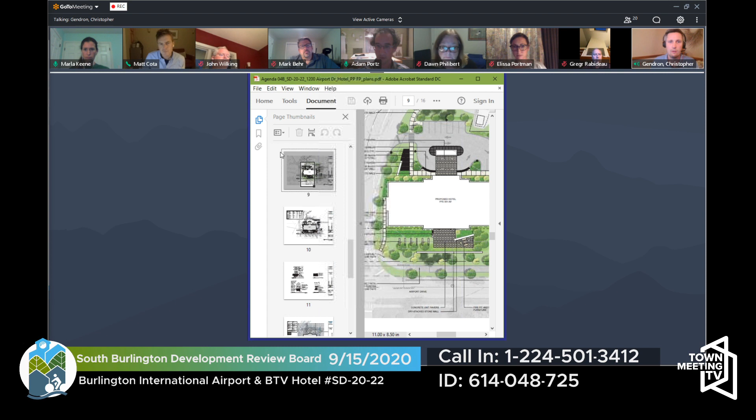Yeah, those 2 graphics right there. So you can see this graphic is showing what was proposed previously, and then the next graphic after will show you what we had updated it to. Hold on a moment, folks - you're a document wizard, it's a lot to keep track of.

So is that the way we're looking at there? Is that path the way it is on the plan, or is that the meandering path? No, that's the one on the plan, isn't it? That is the path on the plan - that is the straight alignment in the original submission, which was more minimalist in its landscaping between the path and the wall.

And if you look at the current plans, it's more in character with what is there today, in terms of having vegetation on both sides of the path, a mix of deciduous and evergreen, creating the canopy experience that I think Marla referenced in her staff review. This includes saving a number of trees - we did some regrading to make sure that would happen.

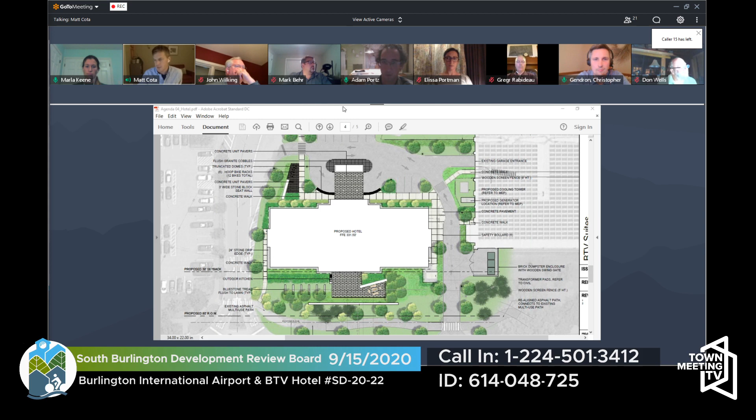The comment is: pedestrian safety is not impacted by the reduction from 22 to 19.28. However, staff recommends the board discuss with the applicant why they believe the reduction is necessary. Staff considers a reduction of 2.72 feet to be significant and likely to result in unsafe parking conditions, and recommends the board require the applicant to reduce the requested modification. So if the applicant could help us understand why you proposed 19.28 rather than 22 feet.

Yeah, I can take this one. It's pretty straightforward. The dimension was actually from those brick pavers surrounding the porte-cochere area, so the actual width is 25 feet. We actually needed more width than the 22 because we needed to do some turning — we needed to make sure vehicles could do a full turn. It's actually Marriott's standard to have 25 feet in front, so we gave them 25 feet, not the 19.28.

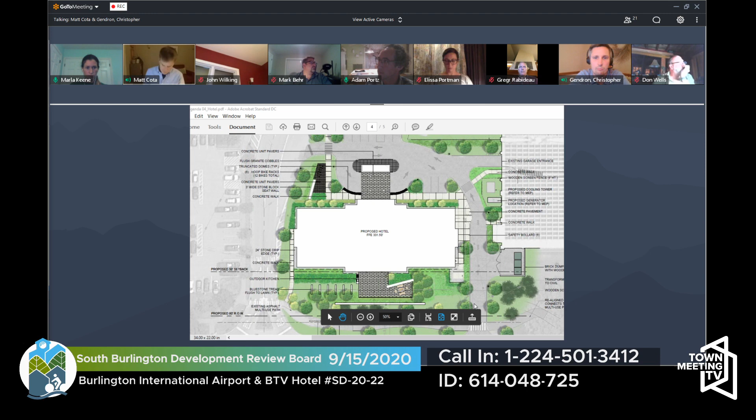I believe I had submitted an updated plan showing that, correcting that dimension, just to clarify. Okay, so we are not 19.28, we are 25 feet, and that will be updated in the plan. Exactly. All right, moving on — it should have been updated already, but I thought I sent it.

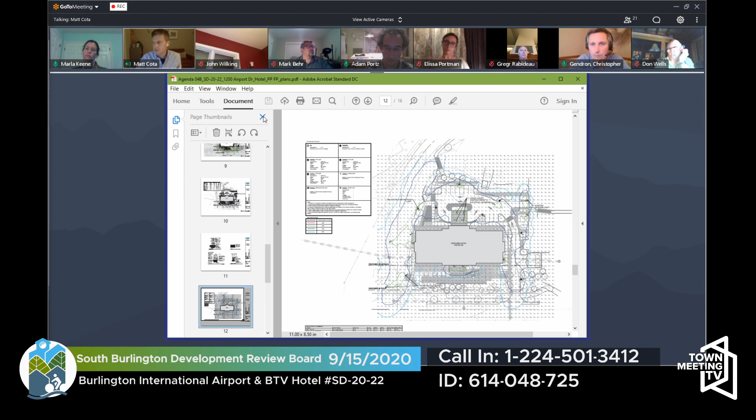Well, let's move on to lighting. The applicant is proposing a new pole-mounted fixture near the entrance drive, which results in lighting levels somewhat in excess of 0.3 foot candles beyond the property line. Staff recommends the board discuss with the applicant whether fixture A1 can be adjusted to better comply with the foot candle requirements of Appendix A, so that lighting levels do not exceed 0.3 foot candles beyond the property line. Is that doable?

Matt, we have relocated the light pole, which was submitted today, to eliminate the 0.3 foot candle beyond the property line. That was occurring down where the pedestrian path realignment occurs. And we have also previously submitted photos of the existing airport site lighting that we're relocating as part of the project, and assert that they are downcast and shielded fixtures. Okay, great.

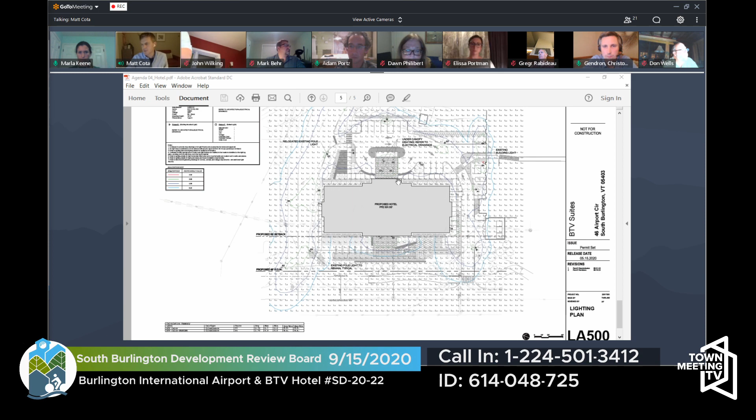Similarly, comment 7: existing light pole, no information provided about the existing light pole to be relocated. Maybe you can show us that on the map, on the plan. Staff recommends the board ask the applicant to provide documentation of the existing light pole to be relocated, indicating it's downcast and shielded. If not, staff recommends the board not allow the applicant to relocate the light, and instead require them to use a new compliant fixture.

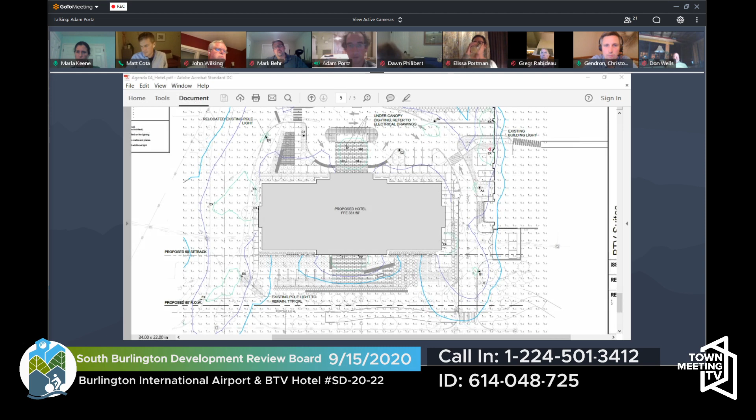Is that what you're saying before about that's going to be downcast, or is this a different pole we're talking about? No, we have submitted photos of the existing lights. The existing lights are relocated very minimally, and we assert that they are downcast and shielded fixtures. Okay, Adam, great, where is that? What sheet is that shown on? I'm not seeing it. I think those photos of the existing fixtures, Marla, were a supplemental from Chris on the previous round, not as part of this round, but our first supplemental.

Okay, thanks, I'll take a look. I'm happy to forward you the email. Oh, I'm sure I have it, I just didn't catch it. I'll make sure I catch it and make a decision. Thanks, Marla. That's it for staff comments.

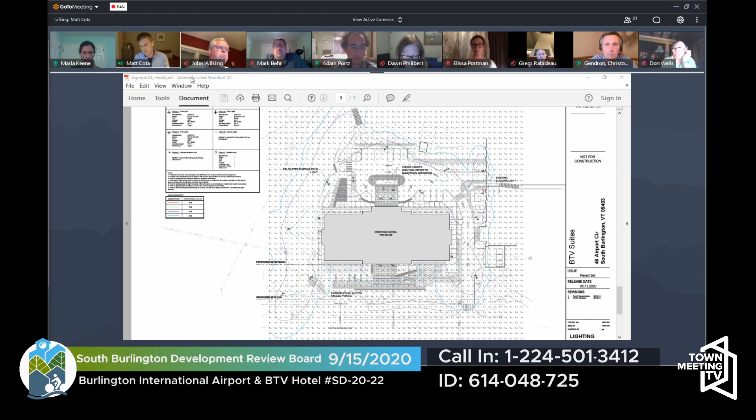You'll follow the stretch energy code, you'll have bicycle and parking storage, and you'll remove all signs from the plan. And that's it on this. Is there any other questions from the applicant for the board or staff, or any other questions from the board for the applicant before I go to public comment?

I think one thing I just want to know is this landscaping budget and the master plan — so likely, if we do go over budget, we're likely going to contribute to the master plan. What is the protocol for follow-up hearings? Is that a condition of approval that we put enough money into that, or does it need to be part of this approval? So you need to submit a plan showing what you're going to do and what that budget's going to be.

Okay. And Chris, we committed to start down at the intersection of Williston Road and Airport Drive. Okay, so that's where we'll be working, to start.

Okay. Is there anyone in the public that would like to comment on this proposal? If so, please say your name or enter your name into the chat box function. Okay, hearing none.

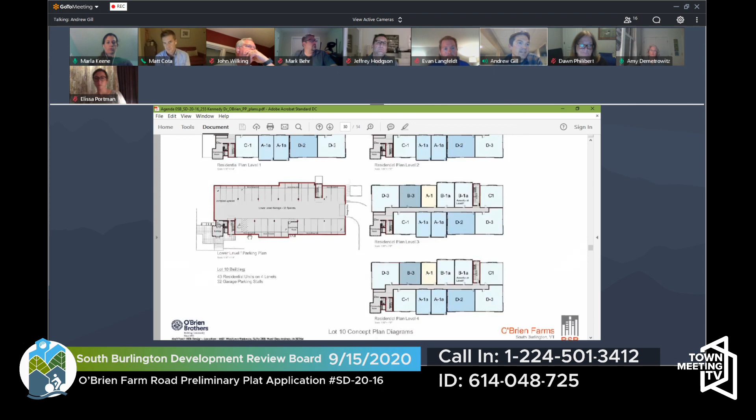I think there's potential they might still move around a little bit, primarily because we were trying to accommodate additional common spaces, larger common areas, and some of the other requests from the board. I think they're pretty solid at this point, but there's always a chance until this gets finalized. I wouldn't see any large change, more than a handful of apartments up or down. Yeah, I wouldn't see anything bigger than that coming.

But we'll have a final number at final plat. I think that's kind of what we're getting to, Andrew and Evan. Absolutely. Is that when we approve it, if it is approved at final plat, we have a number that you have to stick to? You're not going to come back and say we're going to reduce the number of affordable units. That's the number we're banking on. Absolutely, yeah, that's correct.

Now the board can discuss this, we could hold a deliberative session or discuss it here. There were conversations about different views, open for debate, about the idea of having all of the affordable units in one building. At this density, for this project, I understood the sentiment.

I understand how it's written in the inclusionary housing ordinance for affordable housing. In my opinion, but I'm not a lawyer, it seems like this is the acceptable way to comply with the affordable housing ordinance in order to provide affordable units in South Burlington. But if the majority on the board felt differently, I would assume, but I shouldn't assume, that this is the game changer for this project, that this wouldn't be possible. But I don't know. Evan, maybe Andrew, you could fill in the blanks there. How do you build this any other way and comply with the inclusionary housing ordinance?

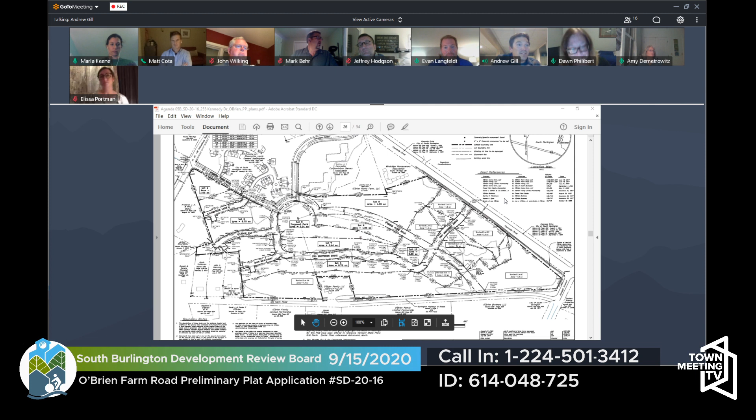So the first two units are 15 and 13. And then what's next in the sequence? What is the next one? It's a good question, and in terms of our best planning, the next one is 12, which is the inclusionary unit. And then the next phase of market apartments, in all likelihood, probably 10 and 11. Okay, thank you, Andrew — however, that could change.

And I think the point we were making was that if you were being more restrictive, say third or fourth for the inclusionary building, we would hope that concurrent permit provision could get put in. It's less of an issue if you're comfortable giving us the flexibility for it to be the fifth building.

Or if you say no later than fourth, yet if you have that caveat that says if the financing doesn't work out for CHT, that it can be amended. And that's the decision that the board has to make.

Yeah, and in any event, I think our point is if CHT was building their building fourth, we would just hope that we could build our fifth and sixth building simultaneous with them, and not have to get their certificate of occupancy prior to our permit being issued. That's the sort of nitty gritty thing we're hoping for. Just so that once they pull their zoning permit and are under construction, we're free to start pulling our zoning permit on the remaining market rate units.

Yeah, I don't think the LDRs really intend to allow you to get your CO for everything but the affordable. I think the intent is that the affordable units aren't getting their CO last. That I think is a separate matter, and we would be fine with that requirement, right? So for instance, if the zoning permit for the affordable were pulled, we would be allowed to start construction on the market rate, but prior to issuance of a CO for the market rate, we could require the CO for the affordable. Got it.

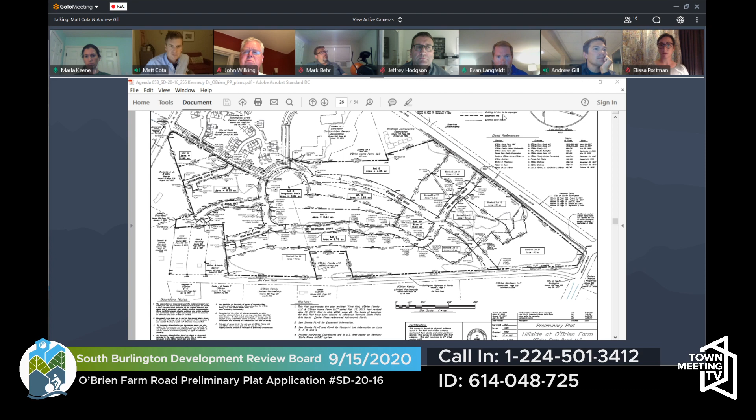Can we see, Marla, can we see a map so I can reorient myself on this roadway—bike lane, recreation path, urban road, urban sidewalk? What's the best plan for that, Andrew?

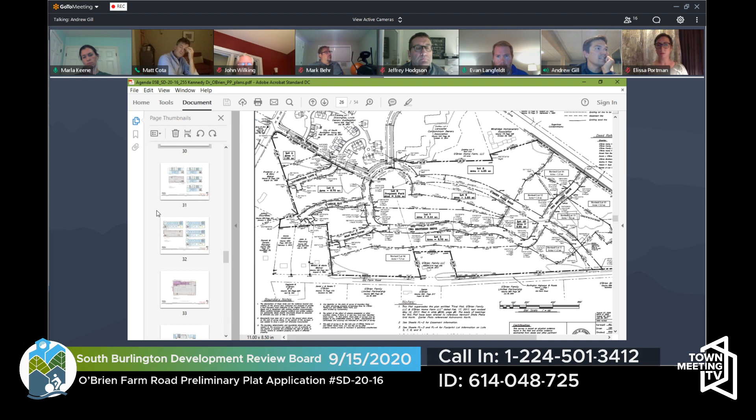Well, I'm not sure if I resubmitted it as part of this packet—it would have probably been in the original. You know, that colorful one has the roadways and units on it, I believe. This one? Yeah. It's a little bit harder to see, but it shows the road; otherwise it would be in the original packet. Unfortunately, I can't access the shared drive tonight for some reason. Also, if you zoom in on this, you can see the road and stuff is shown.

So maybe just to provide a little background on this—I think we have a bit of a difference of opinion with staff in terms of what was permitted in the initial master plan as it relates to this road. We strongly believe this road was permitted in its existing design. There was a lot of feedback back and forth with us, Department of Public Works, and VTrans on it, and it was included as part of the master plan permit. But it was also dedicated to the city and accepted by the city as part of that permit, in its configuration as it exists.

With that said, we're not digging in our heels and saying that the bike lane as it was designed and permitted, or as we believe it to be permitted, is 100% the way it should be.

The reason why that bike lane was designed the way it was is because we met with the Bike and Ped Committee multiple times, and they specifically requested that the bike lane be in this configuration. So we designed it to meet their requests. Fast forward 3.5 years, and there's a slightly new configuration of the Bike and Ped Committee, and apparently there's a difference of opinion as to what the previous recommendation was. We're not pushing back and saying we can't have it that way. The challenge is with the configuration of having to have green belts plus a community rec path plus a sidewalk. There's just not room there.

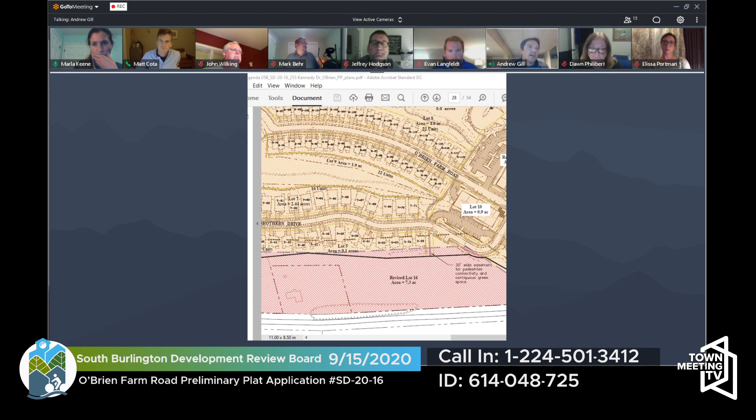So it would again be on, this is just the supplemental, so the snow storage shown in the original submission plans. I don't know if you have those available. Yeah, I can probably do that. This is the advantage of working from home if you save stuff to your local from time to time. Let me find a good example.

I think it's a question that's more general than specific - should it be considered? I think our perspective is we have a really limited amount of space on the site. Snow is obviously a very important consideration. We've identified what we believe to be sufficient snow storage areas. It is the case that those snow storage areas will overlap with places that we might have a picnic table or benches in the summertime. Our working assumption is folks don't really want to be sitting at a picnic table in the middle of winter, but we'll also be looking to provide exterior spaces accessible in the winter. So I think it's probably a balance. We do have opportunities for winter recreation and winter outdoor areas throughout the site, but our hope is that we can consider these as snow storage and something else, because that would seem beneficial to everybody. Looking at it in a more complete picture, the landscaping plans should help pull that together, but our feeling generally is we'll have areas for winter as well.

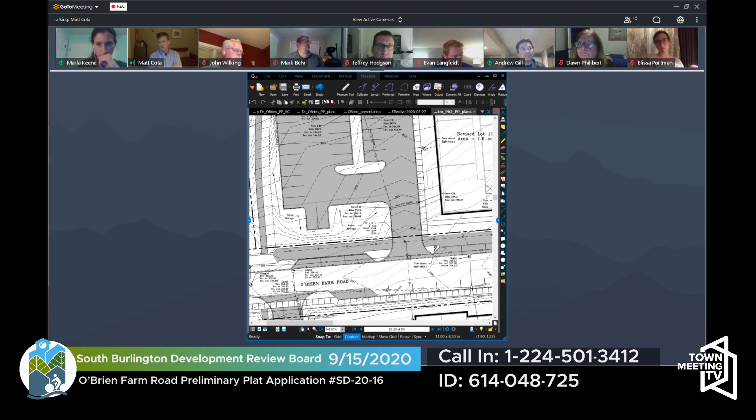I personally don't have an issue with that. Seeing with young kids, snow storage areas can sometimes be utilized as sliding hills. There's a 5-foot pitch on this one. That looked great. Love a snow mountain, dirt mountain. So that's just a different way - in the winter it becomes a different type of amenity, is really what you're saying.

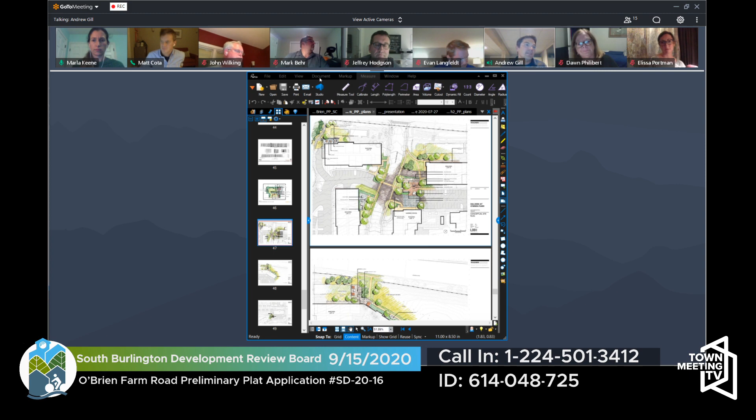There are problems that facially seem insurmountable, and there are ones that I think we are confident we can come to a good solution for. I think this is one where it feels like as we get into the details, we can get this dialed in to a point where it's workable, and the areas for snow storage are able to serve a dual purpose, with a good balance of other areas available during winter when those are occupied with snow.

Okay, well it sounds like you have the blessing of the board, so.

There is one fairly substantial item prior to that comment that doesn't have a red comment, which was the parking on lot 13. It looks like it's at the bottom of page 8, just before we get to it.

The criterion 1406B2 is specifically intended to prevent parking from being located nearer to the street than the adjoining building, which is how the board has always interpreted it. It's one of only 3 criteria which the board does not have the ability to waive as part of the PUD. Staff considers this non-negotiable, and the applicant must remove parking located between the front line of the building and the street. The applicant may choose to modify the front line of the building so that it is nearer the street. Can we see this on the plan?

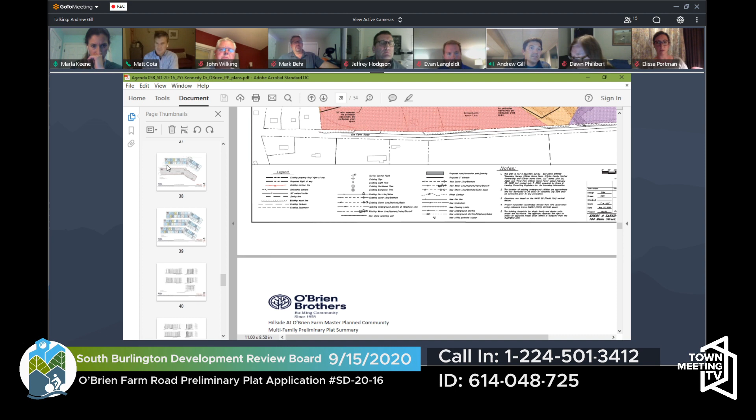The color plan is going to be the only one submitted recently that shows the parking, the original set. This plan works, no parking in front of the building. You've got 3 spots where the area Dalila is zoomed in on, in the lower right side of the screen, is the area being discussed. There's a fairly substantial amount of parking there. I think it's maybe helpful to give a little background on how this little corner came to be.

We've talked a couple of times about how originally the master plan, which is the black line shown, is actually the amended master plan line. It's not the existing master plan line, which would include less of the land and the building shown in the plan here. And that amendment to expand the master plan to this dark black line is with you guys currently - it's the next agenda item.

We had expanded the master plan with that line to include the building and the garbage building, because when we worked the inclusionary requirement into the plan and increased from 340 to 390 apartments, we had a challenge hitting everything and needed to expand a little bit, which is where that master plan expansion came in. The challenge we faced, and a conversation we had with staff a long time ago, was that if we pull all of the parking currently below that black line into the master plan, it takes that acre and a half of land and 18 units associated with it, and ties them with the current master plan where we can't fit any more units.

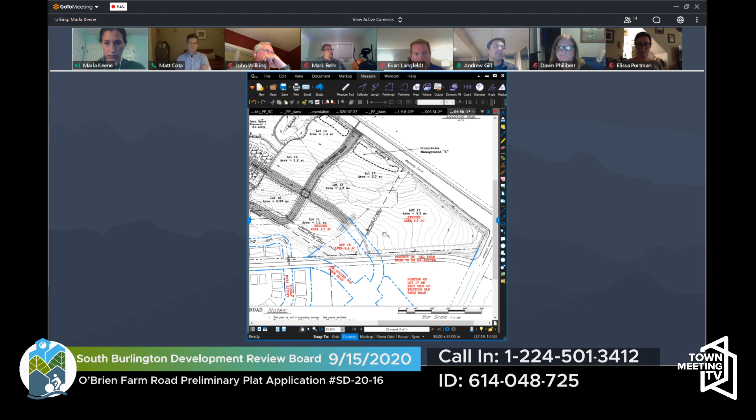So in terms of the wall or structure, does it have to be connected to the existing principal building, or how does that work? Do you know what I mean? Does it have to come off the corner of lot 13, or is it a standalone feature, whether it's a wall or something else?

Well, there's a history of them not being connected. CVS is a good example of not coming off the building.

So it sounds like the conditional use review happening simultaneously to preserve the density is something that's understandable and workable, and that we should look at an idea to block the view of the parking lot somehow with regard to those 6 or 8 spaces that are proud of the plane of lot 13's building. Does that sound right to everyone else on the board?

So we're talking, there's sort of a line drawn here and it's these spaces here. And then what about the spaces that are truly not associated with the lot 13 parking lot, but are part of this drive aisle thing?

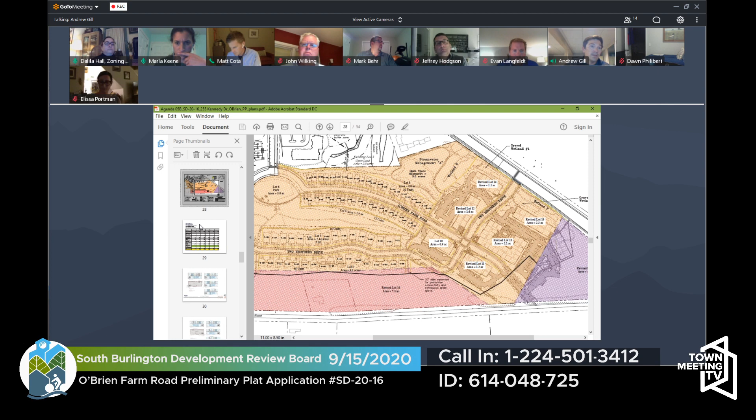So yeah, you could. Oh, I see it. Yeah, we're at page 10 for those who have the packet in front of them. Yeah, this is where the living space is at street level. And the staff was wanting to see if there couldn't be entrances on the first floor. Yep, so this is the unit, and that's the elevation, the southeast elevation.

Obviously it's not as pretty as the renderings that we showed you at the last hearing that had landscaping and stuff sketched in by hand, but this is an updated architectural elevation. So you can see the door that we added two-thirds of the way down the structure, and we have these Juliet balconies sitting down near the ground. I guess the question is just, is everybody comfortable with the connection to the street that we're presenting here with this updated elevation?

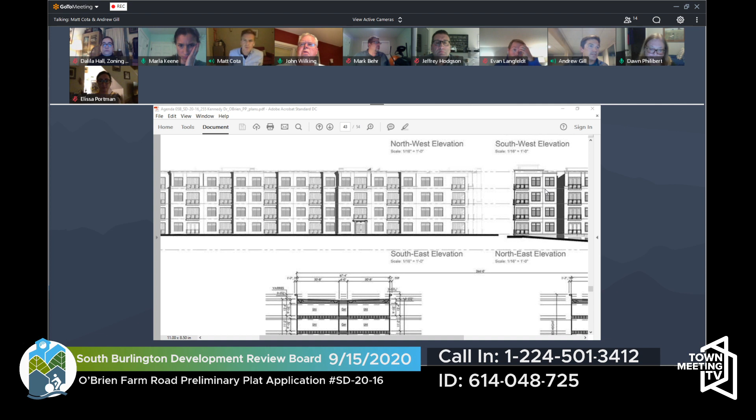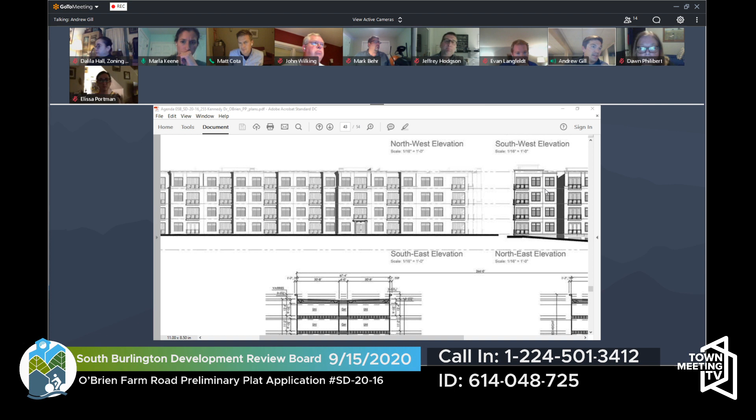Tell me a little bit more about what's changed since the last hearing regarding the entrance, the doors. Well, so essentially the door you're staring at, which is just to the left of where it says southeast elevation - so right here - we reoriented the units and created a community room there in the interior, and then created a new door in the building. So now instead of there being no doors to the street on that side, there's one main door. This particular area is easy to overlook in the plans, and this is the same location where the parking lot sits, proud of the plane of the building.

The grade of the site is running kind of like this, and the road is essentially where this yellow line is. This is obviously a gross approximation, but as you're heading up, the road is getting higher than the building. So there's a drainage way running between the road and the building in this area. Our feedback - yes, there are issues in terms of rentability or marketability, but also aesthetically, it's an odd intersection to have steps down and then across into the building. It also creates some practical concerns, which are seemingly beyond the purview of everybody on this call. But if you have a drainage way running through there and you're creating walkways across, you're also creating areas for water to dam up.

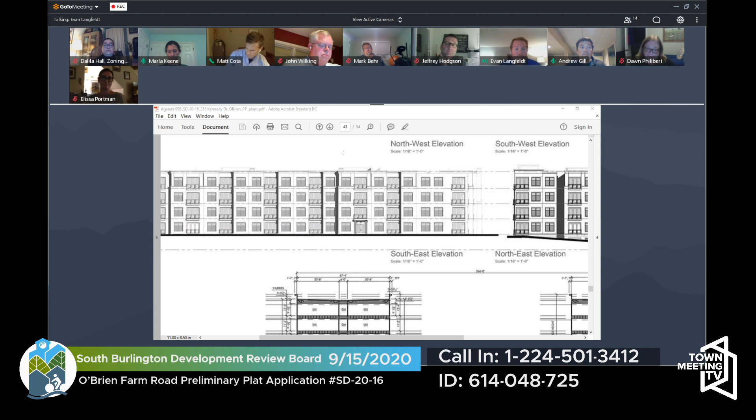No, I have no problem with your practical considerations in terms of design. My concerns are entirely on what we're saying about the people who live in multifamily buildings. Well, it seems like there are adequate design considerations, so if that can be the focus of the finding, then that's certainly...

Can I say something that's probably contrary here? I've lived in a city, I've lived in large apartment buildings. I think the lobby is what fosters a sense of community. I think the lobby is where you meet your neighbors, and I don't view it as less than anything. I wish I lived in a large building with a lobby. So having that access point and not having individual entrances, whether from a sense of community or an aesthetic standard, it doesn't move me having individual entrances. You're living in a multifamily building, you're not living in a single family home. The lobby is part of the appeal to me.

So yeah, Matt, the other thing about this is it's often not the people in the building that are the concern, it's that you're protecting the people in the building. You're making sure this is an access point for 50 units or whatever, so somebody who gets in who doesn't belong is a significant concern. I just totally don't get where we're coming from. This isn't downplaying who lives in the building, it's an access issue for security. It's no different than a hotel.

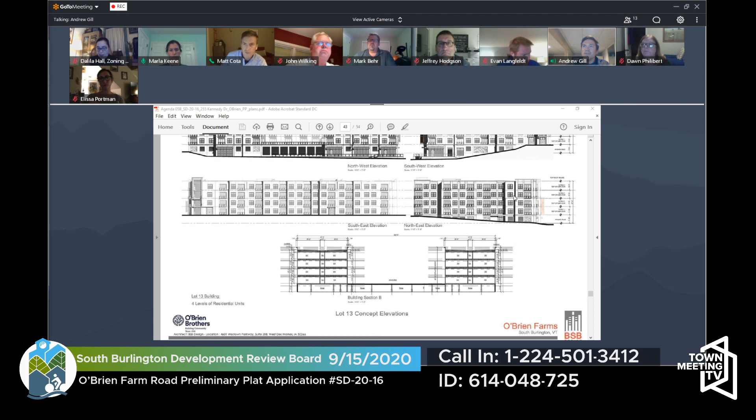Okay, what else is there? Anything else that we missed or want to go into in greater depth before I turn over to public comment? Hearing none, go ahead. There was one comment, I created like a thing of notes here.

It's item number 2. Where is this? Proposed structure shall be related harmoniously to the site.

So there was a staff comment about the applicant, in addition to concepts presented, providing elevations to demonstrate a harmonious relationship at the transition between buildings at the next stage of review, with particular attention paid to the intersection of O'Brien Farm Road and Two Brothers Drive. We're at the location where phase 1 area abuts phase 2 area. Could you guys or could staff just elaborate a little bit on that, just to make sure that we understand the sort of directive there?

Andrew, I think I see your point. Two Brothers Drive and O'Brien Farm Road is not the intersection or the transition between the two phases - there should probably be an extra comma in there. You provided some landscape drawings that the board has taken a look at and didn't have any questions about on the intersection. So what remains is, where phase 1 and phase 2 kind of abut, just to make sure that that's an appropriate and not an abrupt transition.

Okay, and what are the types of things that you guys see used, or like seeing used, to sort of affect that? A good sheet would be page 49 of the plans.

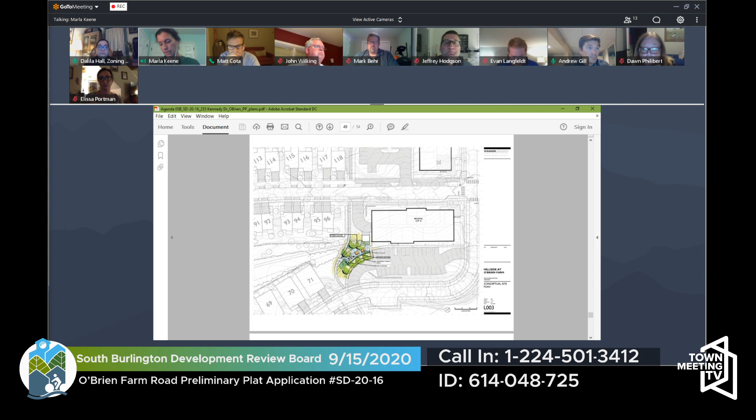So Andrew's question is, what would be an appropriate transition? We have the landscape architect here and you guys are looking at it. I want to make sure we understand the concept would be to provide a significant landscape space in this area. Is that in keeping with what you guys would be looking for? Are there other elements that help, or is it just come back with a landscape plan and don't be shy? Because that's probably the way we would tackle it, to just put a lot of landscape here, trees of different types and sizes, and hedges.

You're transitioning into a more urban setting through here. I speak only for staff in saying this, but I think our perspective is that the landscaping should complement rather than stand alone in these areas. You've got your retaining wall that you're obviously going to take another look at. There can be features that are not shielding, but are rather enhancing.

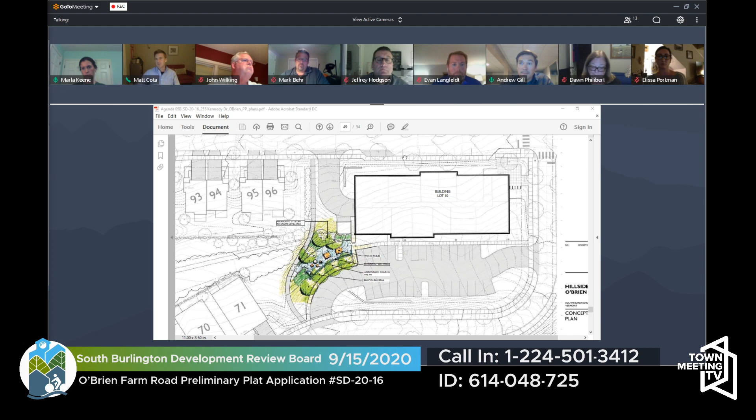Okay, are there any comments from the public related to this project? If so, either put your name in the chat box or say your name. I think we've lost everyone who's not part of the applicant team. Okay. Yeah, it looks like it. I'm looking at the 14 people on board.

Okay, so where do we go? Well done, guys. So where do we go from here? Our original suggestion was to sleep on it. Given how it went tonight, I kind of feel differently, except that Brian wasn't here. I wonder if you should still sleep on it—give Brian a chance to review the video, the plans, and the minutes, and then continue it just in case. Meanwhile, I can start writing a decision.

And was there a concern for working through the parking on lot 13? Or, I mean, I think we would be comfortable dealing with that at the next stage of review, but that's a question for you guys. If we need to present something, we'll get it turned around quickly.

It sounds like you have a game plan to me. It sounds like you're going to provide an architectural element to the satisfaction of the board for the lot that's contiguous with the parking for lot 13, and you're going to design the parking that is not contiguous in a manner such that it does not encumber that lot for future development. So it's a temporary style. Right. Does that sound—everyone nodding? No one's shaking their head no. Sounds like what we talked about. Okay, I can do that.